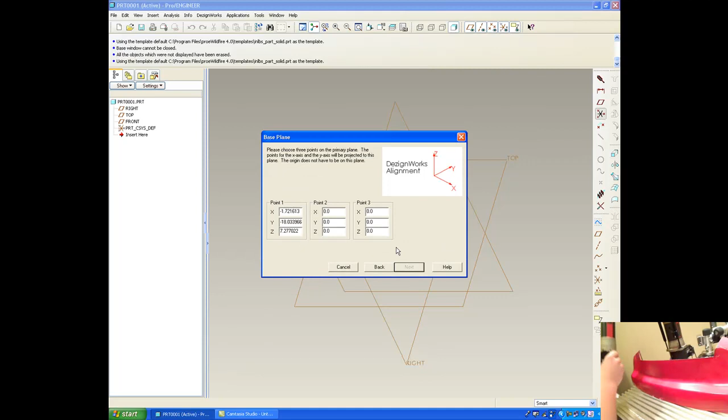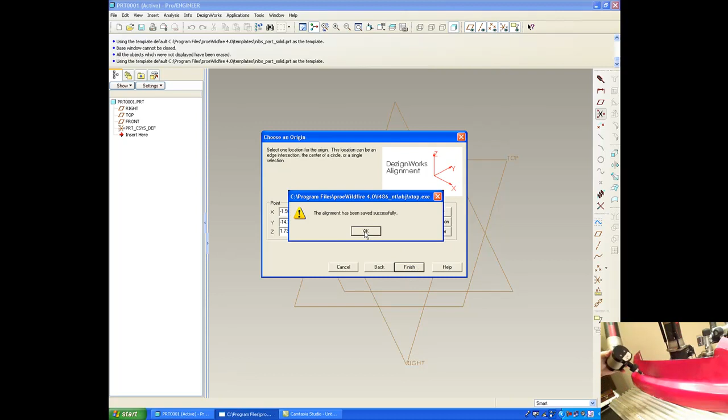We're first going to go ahead and create alignment. The nice thing about having a portable digitizer device is you can take it out to the unit and actually create alignment anywhere you want. You don't need a special table or anything. So we're going to create alignment that's actually going to be normal to the ProE interface. Once you create that alignment, our goal is to capture that complex surface and then go ahead and build a bracket to fit it and then put some holes for mounting.

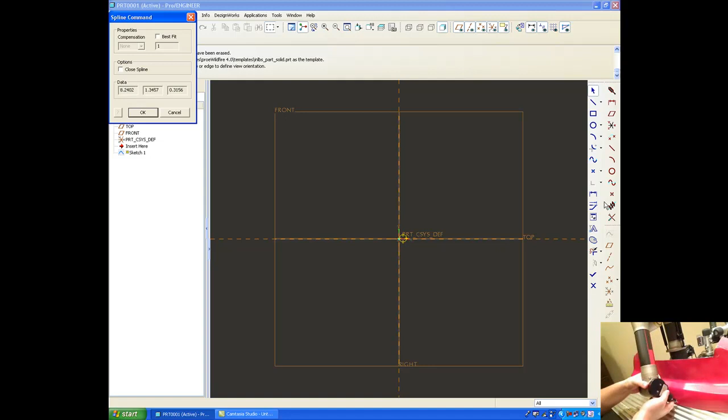So we're going to select the ProE plane and then use the Dezignworks tools. You notice on the right side a new toolbar has been added, and those are your Dezignworks tools. They match all your ProE sketch tools. So we're going to outline a little bit so you can see where we're working. We're going to grab that bottom shape. It's actually going to take the arm, just take some points along the bottom contour so you can actually see their working area.

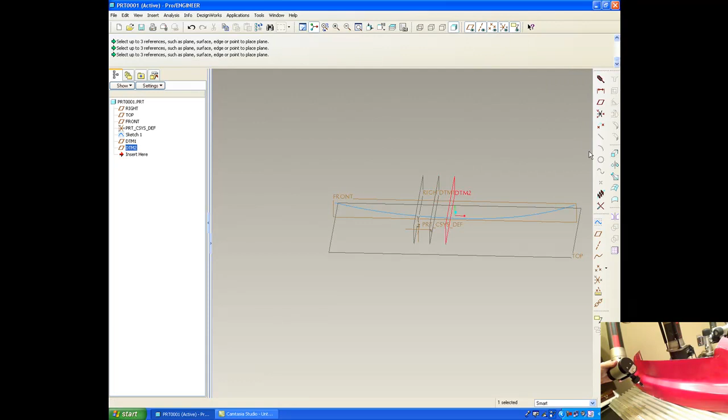Now we're going to go ahead and use the plane tool in ProE, and Dezignworks is adaptable to scan through planes inside ProE. So basically what we're going to do is put 3 or 4 planes across the area we want to work, and we're going to turn the arm into like scan mode. So now that you see we have those planes, we're going to use Dezignworks locked plane tool, and basically you can set a minimum distance, and he can actually select those planes right from the ProE tree, and we're going to use that tool to actually go scan through those planes.

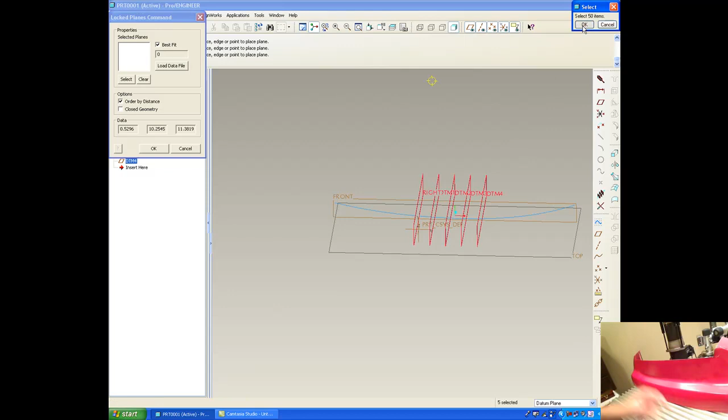Once they're selected, you simply keep the probe in contact with the part. So now you'll see he hit the button once and he's just scanning. You can make the minimum distance whatever you want. I think in this case we made it about 1/8 of an inch. So we're capturing the cross sections of the contour shape. Then we'll utilize the ProE surface tools to build a surface. Again, all the features that are created with Dezignworks are native ProE features. They can be modified, changed, right from the ProE feature tree.

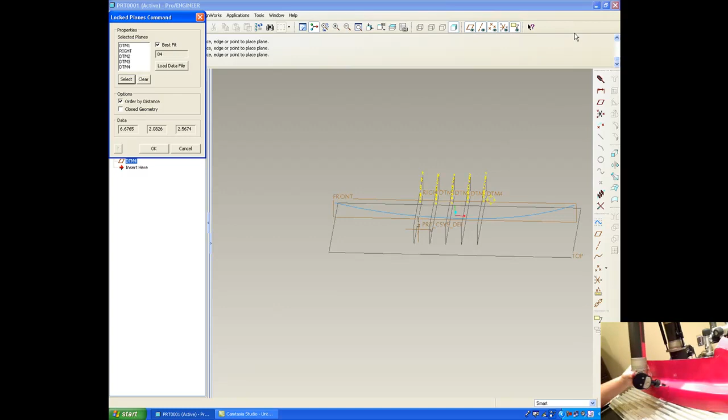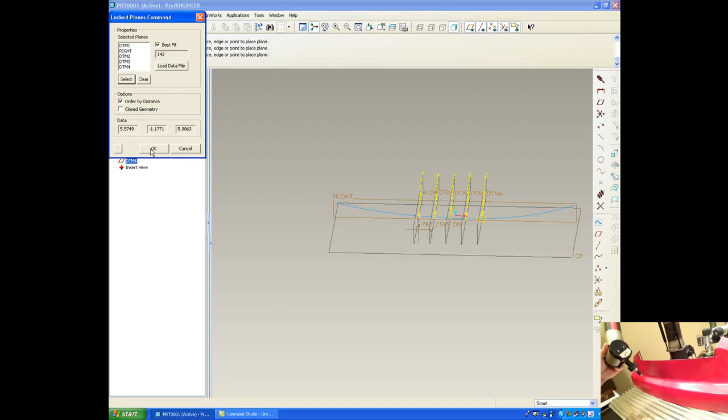So again, you can scan one plane or hundreds of planes. You simply are keeping the probe in contact with the part. You can back up, you can overlap, stop, start, rotate, whatever you want to do. Once you think you have enough data, you go ahead and say build it. Now what you're going to notice in the feature tree of ProE, you'll see where it says sketch 2, 3, 4, 5. These are all native curves. You can edit those individually, pull, tug, whatever you want to do.

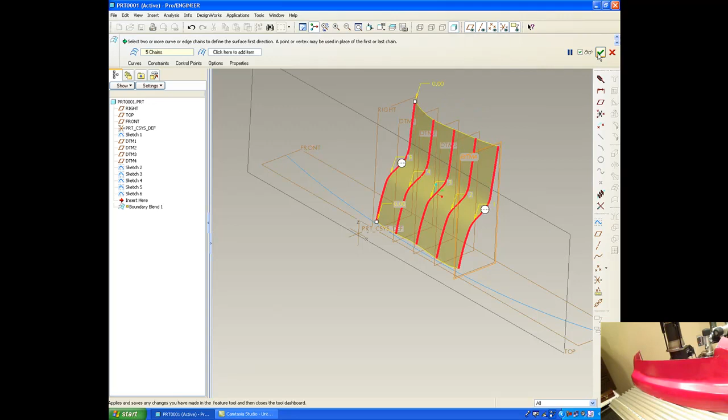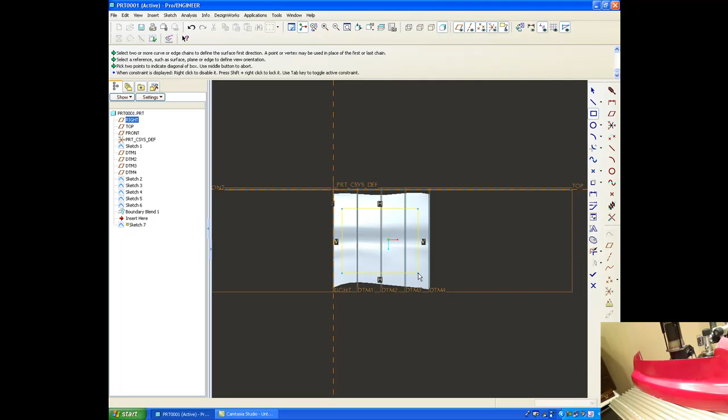Now we're going to go ahead and use one of the ProE surface tools to create that surface. And again, the key feature of this is these are all native ProE entities. You're not importing or anything like that. Now that we have that, we're going to go ahead and actually just pull out a plane with ProE, and like you would normally, we're going to draw on it and actually go ahead and extrude it up to that surface. Because what we're doing here is we're making this mount that we want the back of it to match the surface perfectly, but the face facing us, we want it to be flat so we can put some other things on it. Something maybe like a license plate bracket.

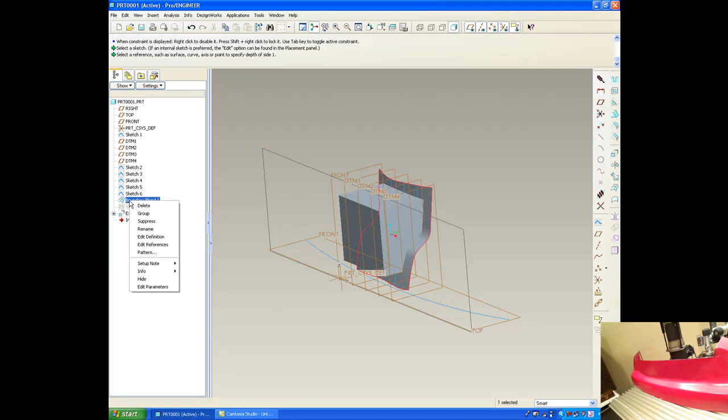So now that you have all that, we went and sketched on that plane, and we can say up to the surface we created. Because again, everything we create is a native ProE entity. Now you'll see your complex shape. So if you want, we can maybe put some mounting holes in it or something. We went ahead and hid the original one because we don't need it anymore.

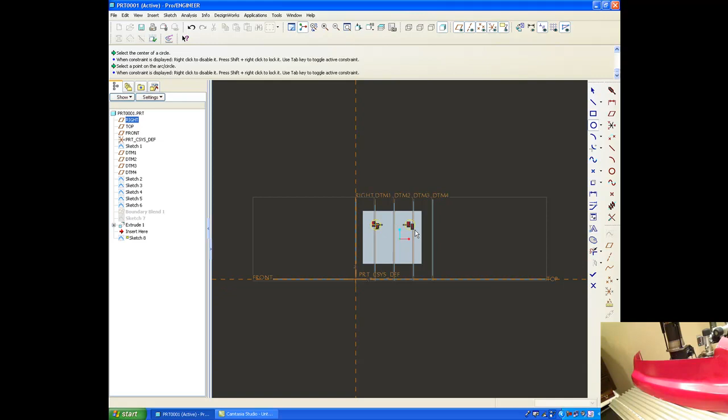So again, we can just pick that face. And now we're just using the standard ProE tools to work on it. Because you see how fast we grab that shape. That's the key, is how fast you can grab entities and build off of them. These will pretend to be our mounting holes, so we can do a cut back to those. Then you see how fast we can make that bracket.